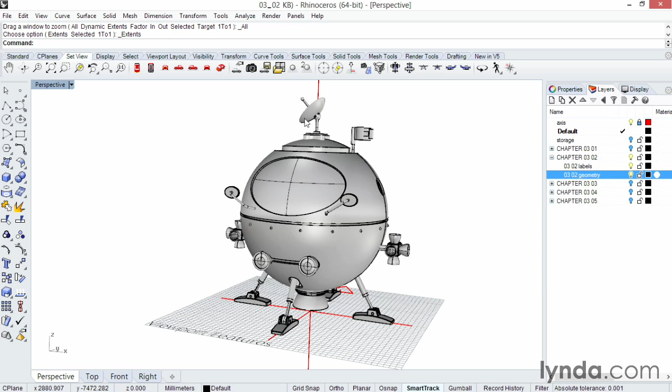One thing to note is you have only one active viewport at a time, so Rhino knows what you're looking at and what you want to modify. You activate each viewport just by clicking its label. Right now we're active in perspective. Another cool way is we can double-click that same tag and go full screen, then double-click it again to go back to the original 4. That works with all of these. Anytime you see a viewport, you can just double-click once, double-click again, and revert right back.

Now there's a new feature in Rhino 5. It's got a little pull-down arrow, so it's a little easier to find. There's lots of different modes: changing views, moving cameras, turning grids on and off, etc. Some of these are also duplicated in the menus and some toolbars, but this is good to know is here.

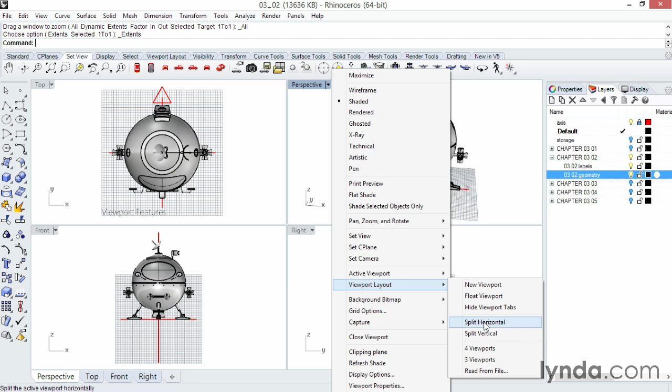We even have options as obscure as splitting the viewport, so I'll show you that. This is rarely used, but you can come down to split horizontal, vertical, and then whatever current viewport gets chopped in half. You might want to move these dividers around. You can mess it up pretty easily.

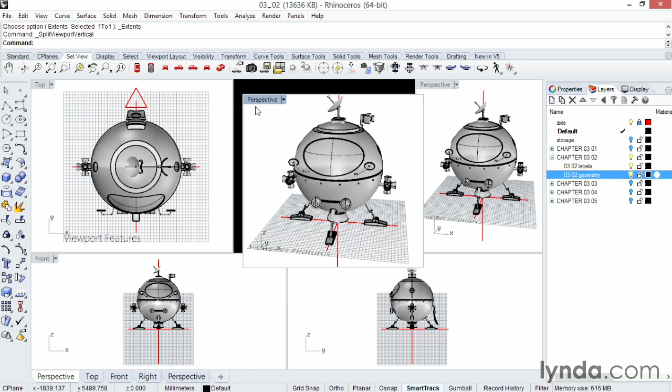Another little way to mess this up is by accidentally clicking and dragging - we're looking into the great beyond here. Some beginners will try to snap these in, and it gets kind of painful when you have multiple ones accidentally moved out. So let's show you where to fix those.

We're going to go to the Viewport Layout tab up here - it's probably the quickest way to do it. The second icon is just show all 4 viewports back to the original. Really handy, I use that all the time.

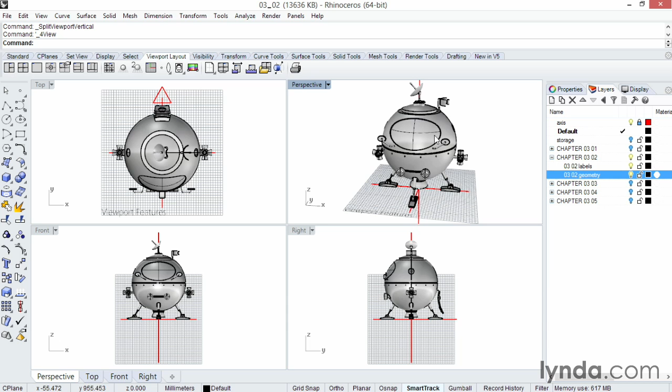Another problem people run into is panning and zooming and just getting that center not where you expect it to be. So here's a quick, easy way to get this back to where you expect: you can click any item or all of them and go to Set View, Zoom Selected. Not only does that recenter everything, that's your new center of rotation too. It's actually very handy.

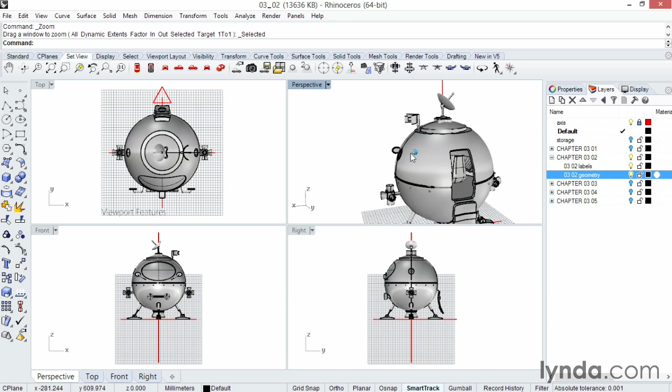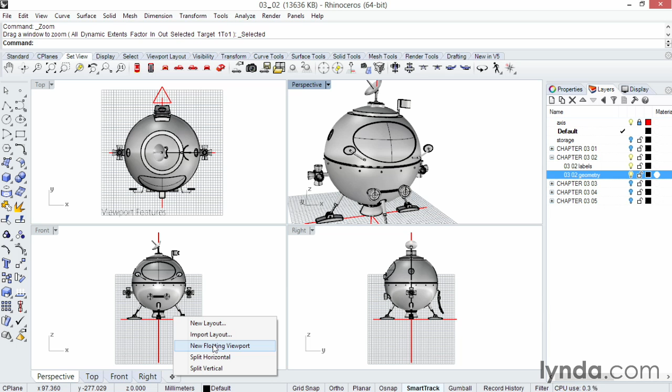Now I'd like to show you one of my favorite features, and this is kind of a caveat - it works best if you have multiple monitors, otherwise it's just kind of getting in the way. Here's a new way to launch this command. There's several buried in, but I like going down this tab button at the bottom, and we'll say New Floating Viewport. What's going to happen is it takes the current viewport, which is perspective - I can tell by the label - and just makes a copy. These are independent, even though they've got the same name, so I can do different pans and zooms.

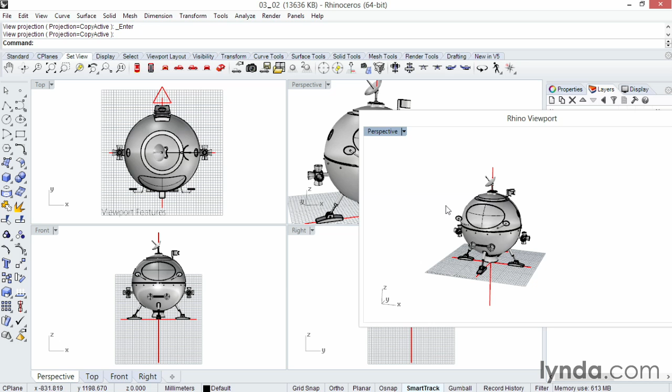Now you're saying, why do I want to cover up my work? This is best for dual monitor setups. You just take this over and snap it full screen. That could be a great way to have an overall view, while on the other perspective, back on the first screen, you could be zooming in and checking out other stuff. Let's close that since we only have one monitor.

Finally, a lot of people like to have their views perfectly aligned. I'm not a big fan of it, but it's critical for some extremely mechanical types of design. We'll notice here that these are kind of by default fairly in alignment. I'm going to screw them up just a little bit - I have one zoomed in, one zoomed out, one moved over.

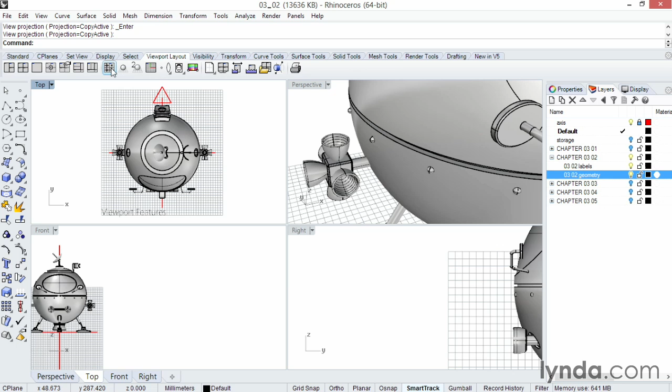Now I have to pick one of the viewports to be the master. We're going to go to the Viewport Layout tab and then pick Synchronize the Views. What happens is all the other views will be perfectly aligned and the same scale - of course, until you move or pan either of those. But you can actually lock this operation; a right click on that same button will toggle them. Now if I zoom in on this top view, look at the other views - that is pretty cool.

So Rhino allows for total customization of any single or combination of multiple viewports. This customization includes the viewport size, its location, its name, and the view of your model. However, the basic 4-viewport mode is the universal standard for a good reason, so it's probably best to stick with this convention during your initial introduction to the software.